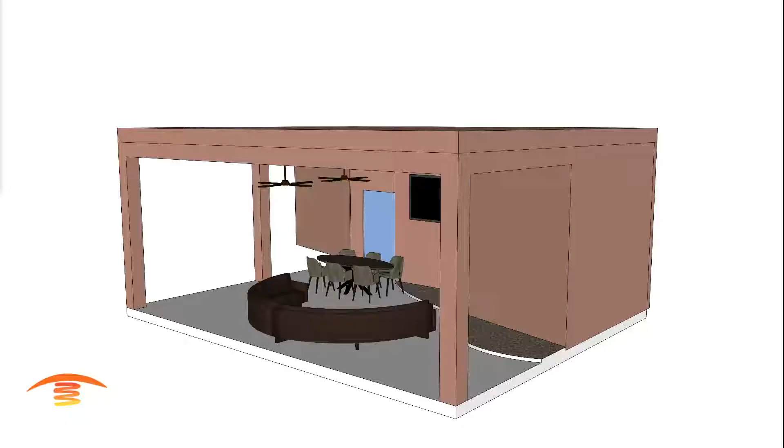I have the can lights up here about 4 feet off this edge, 4 feet off this edge. I didn't put that one over there. I do see that we have a couple of angled walls here, and there's a TV set back there. So let's go ahead and see what we can do. Alright, so here's my drawing, and you can see I've simulated most of what is in here. I do have these can lights up here, again 4 feet in, 4 feet in from here.

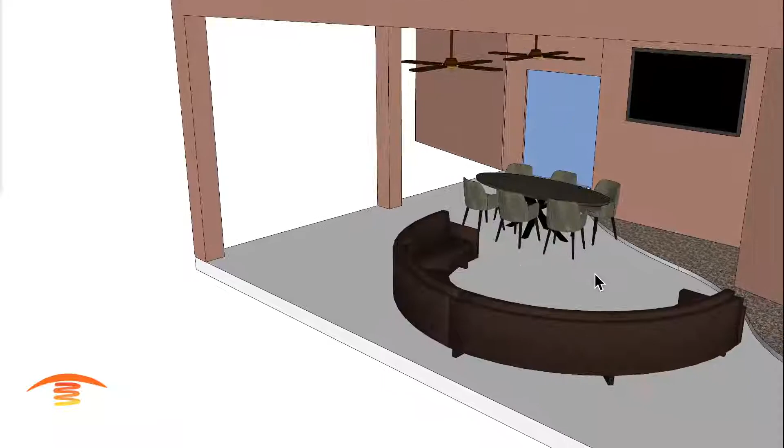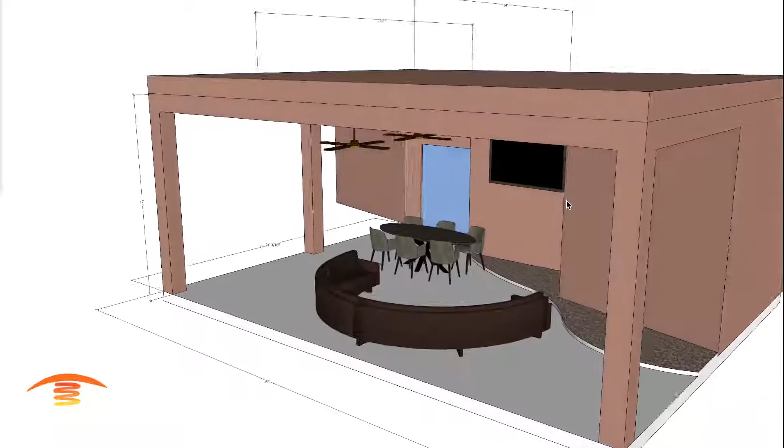There's a sliding door here. I got a TV set over here, oval dining. I think it does drop down. I don't have that drop down here. Let's go ahead and look at the dimensions that I have. Dimensions overall, I have about 30 feet this direction, and then 24 that direction to this edge here. To this edge here, I have 19 feet to the outer edge. And then from this edge right here, this angled wall, starting at point, I have 14 feet. So that's kind of my dimensions. And oh, and I have 12 feet ceiling height here.

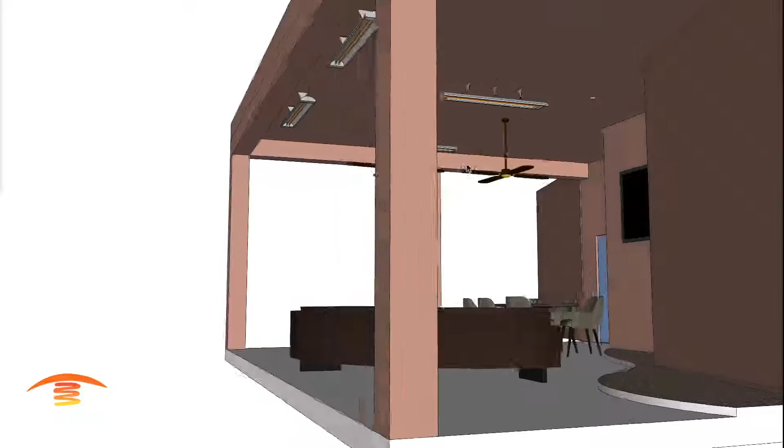All right, so let's go ahead and look at what I have. What I've done here is placed 4 units. I got 4 6,000 watt units. Now these are on the OEM 6-inch brackets. You might consider placing them on a longer bracket. 12-inch is the longest that they make, so you may consider making your own.

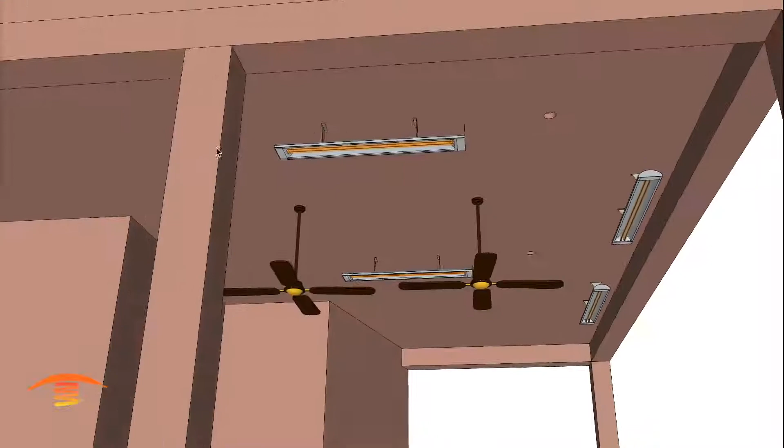Oh, and I have them just placed in line with the lights, 4 feet off the edge of the wall, centered between the lights. True over here as well. This one here I have centered on the fans on the edge of the structure here, and then this one over here I have at just 10 feet center to center.

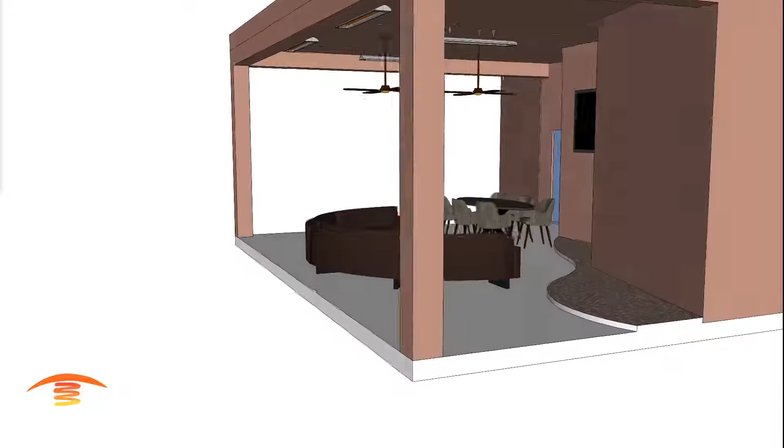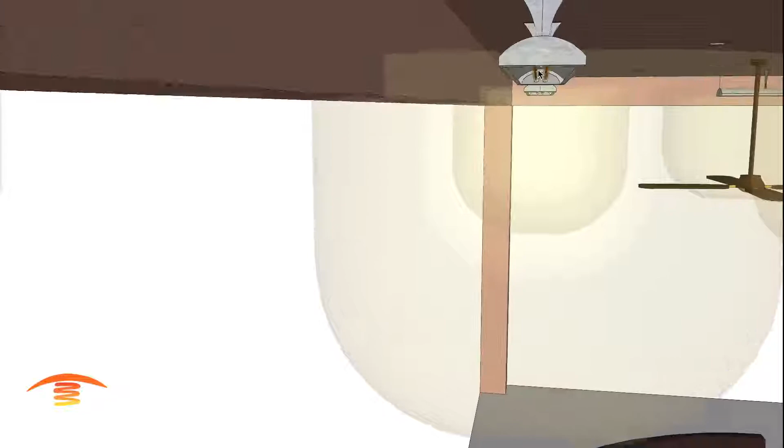Okay, let's go ahead and see the clearances to combustibles. Now clearance to combustibles down here you can see are not met, and so you can change this angle, and I have it at 8 inches off the edge right now. You can change the angle. I'm not going to do that yet until we know some more information, but changing the angle will drop this clearance edge below the heater so that you're meeting the clearance.

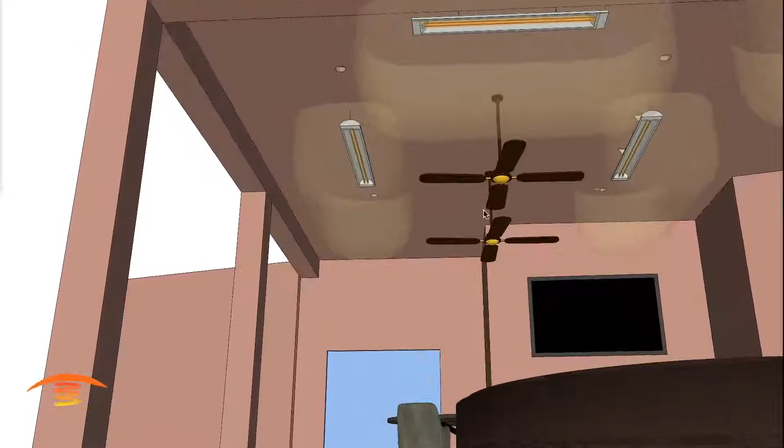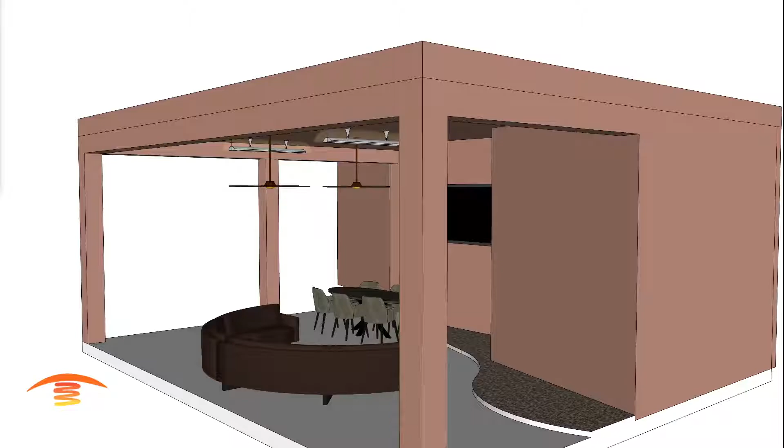And then of course between the fans you can see there's no issues with that, if in fact this is approximately 4 feet from the center to the center, and then to the center of this one as well. So there's your clearance issues, and I think that looks fine. I'm going to turn that off. Clearance above, you can see no problem there.

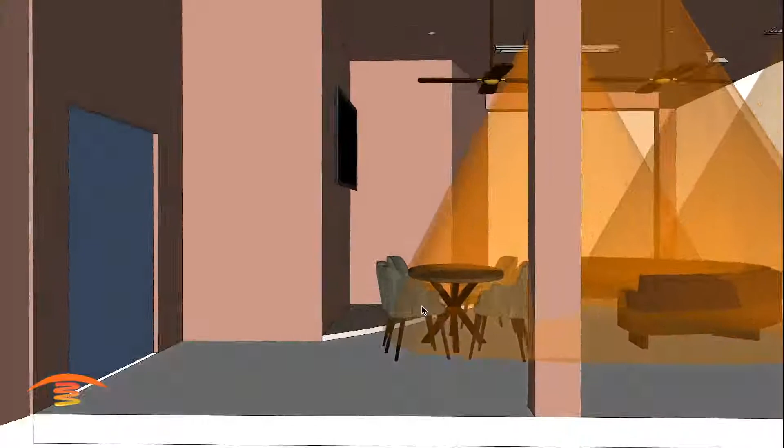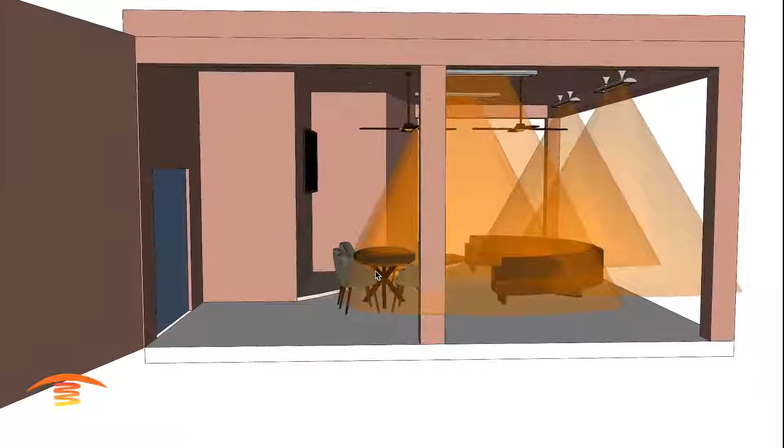Okay, and then the footprint of heat. So footprint of heat, you can see that we're covering the majority of the space fairly well. Now this section over here I'm not covering quite as well as I'd like to, but you could put one more heater over here, but you're going to only capture the chair and a half here if you did that. But for the most part you get a pretty good coverage. You can see here that I do have this seating here kind of almost in line with that edge of the wall there. So that would be the footprint of heat.

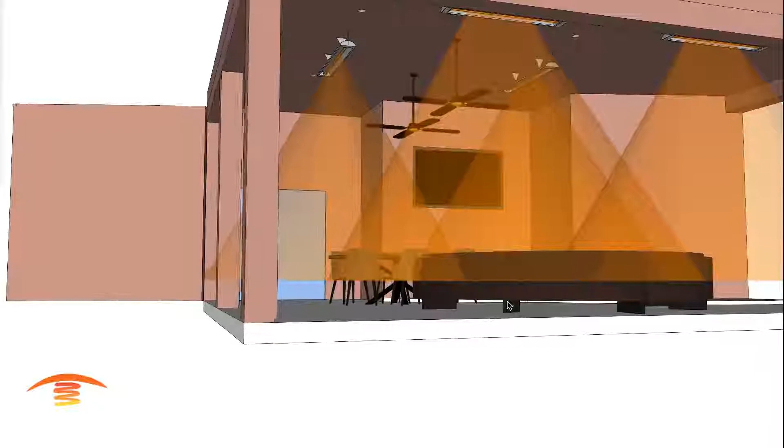Now the heater itself at 12 feet off the ground is at its maximum output, and you can see that I'm not really heating up the space as I would like to, so I'd like to see the heater dropped maybe another foot. It would be a lot nicer, or you can gather the heaters a little bit closer. Now we can't do that with the fans.

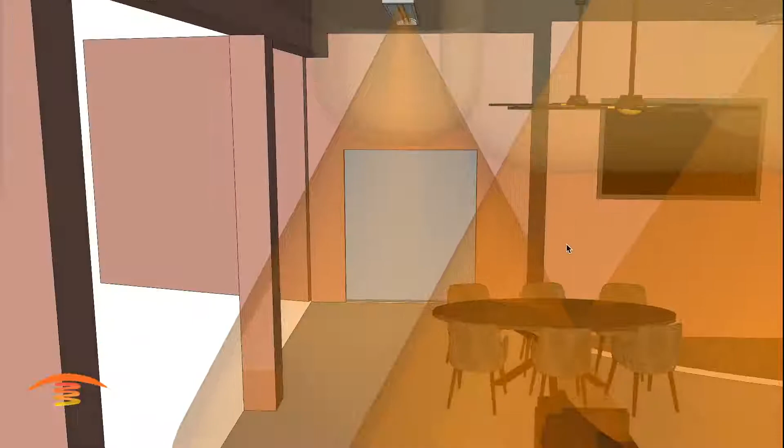The only way I can do that with the fans, if I turned on these clearances, I would have to make sure that I'm meeting the clearance to this edge, so I could push this in slightly to get a better coverage between the two heaters here, but then it would be off center as far as the lights are concerned.

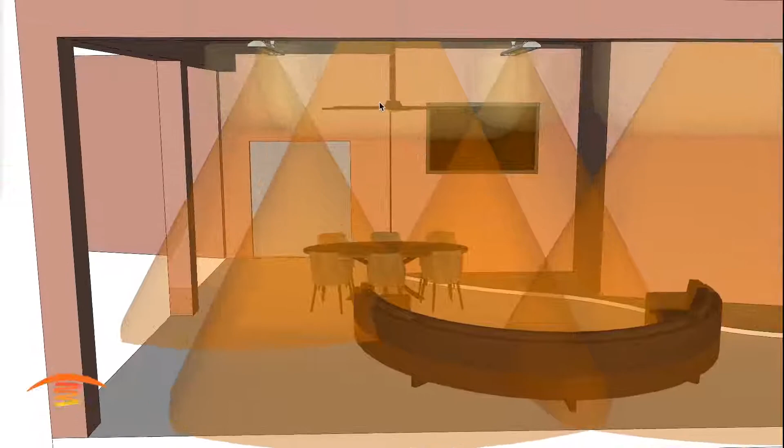So another thing you could do is maybe slightly change this heater angle inwards and this one slightly inwards, maybe just 5 to 10 degrees, and still meet the clearances to combustibles on the fan blades. I have the fans down, by the way, at 3 feet off the ceiling, so I think that would be a pretty good application. In any case, that's what I have for you at this point.